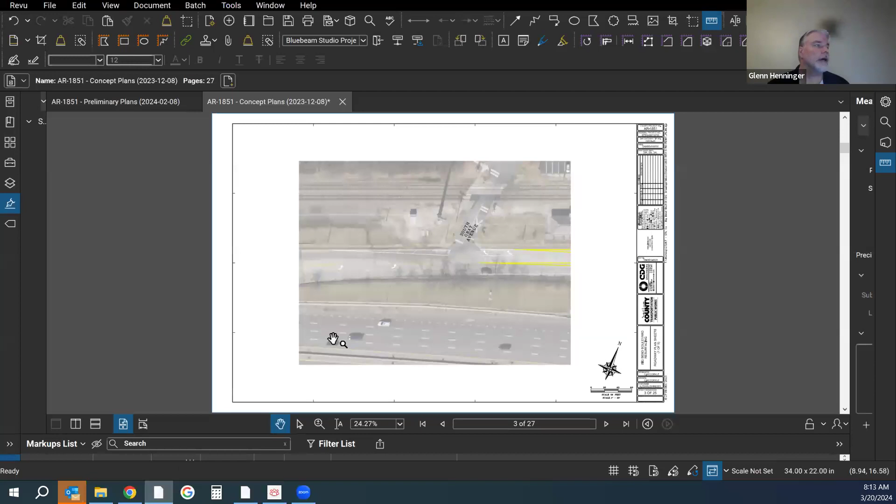All right, can everybody see this screen okay? You see a bunch of pavement, yep. So this is South Gore Avenue. There's the end of the old railroad station right here.

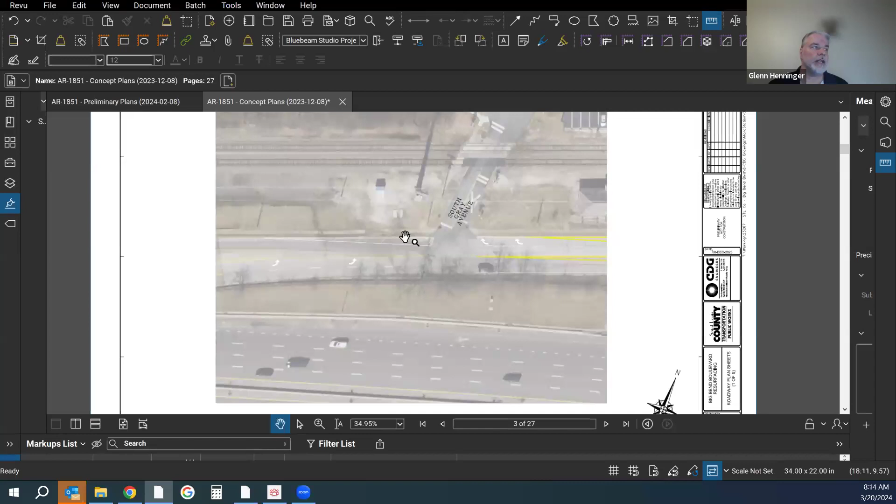Technically, this is actually MoDOT's to maintain as it's approaching their bridge, and they will be replacing their bridge shortly as well. We tried to get that incorporated into our project. They are going to be using that extra space for staging of equipment while they're doing their bridge project, but they did promise that they would mirror our striping patterns and would be including a resurfacing all the way up to our project limits with their bridge. So everything will be new eventually. The striping you see on this page is really just kind of temporary until MoDOT finishes their project.

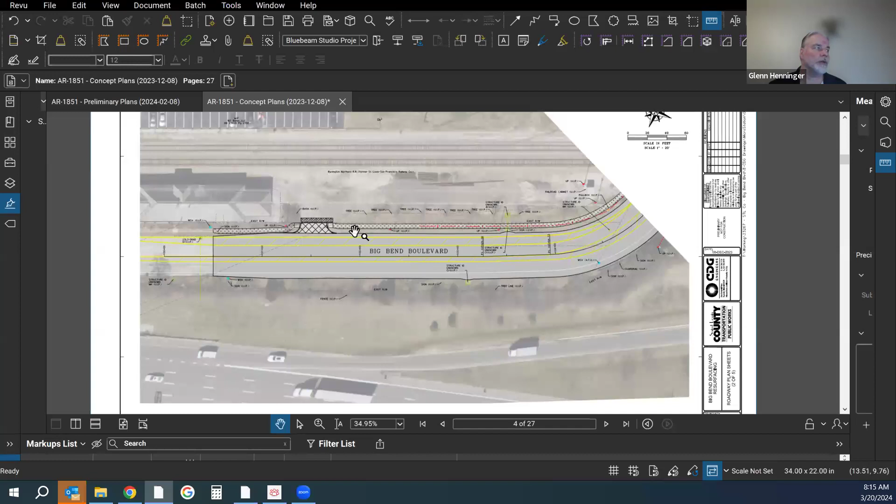Moving east from there was the area that was of concern to us, to try and keep the way it was. Here's the old railroad depot again. We'll be striping out 2 lanes and keeping 1 through lane in each direction. We'll have all new pavement, all new sidewalk, and a new entrance into the railroad's depot.

And moving on from there is where we really get into the area of interest for you all. Once you cross the railroad, we still have 1 through lane in each direction. We try and clean up the Baker Gore intersection as much as possible, with a little bit of curb work, bulb outs, some striping changes. With the road diet now, we are able to provide a dedicated left turn, so that anybody turning left into Baker or Gore can do it outside of the through lane, which is always a good thing for us.

Also in this area, there's a house here with a driveway directly on the corner. Not much we can do about that without actually buying him out, and it wasn't worth buying him out. It hasn't really been causing a safety issue, and speeds are supposed to be fairly low. We will be replacing all of the sidewalk, all of the approaches, and we will be adding a striped and signed crosswalk with refuge.

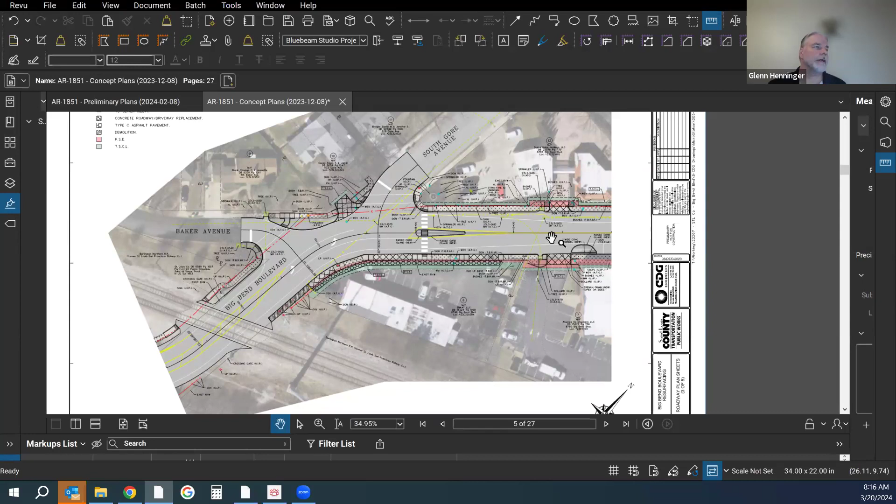Glenn, do you want questions as we go, or do you want it to go through the whole project and come back? I'm good either way.

When you talk about sidewalks, is it the same width as the current sidewalk, or do we see a little expansion? The county has a standard that goes a little bit beyond ADA when sidewalk is at the back of curb. We try wherever possible to go for a minimum of 6 feet. If there is a green space, we will follow ADA, which is a width of 5 feet.

And then we'll have ADA ramps at all these crosswalks and such, so this isn't just a step down curb, it's a ramp. Anywhere you have the shaded area, it's what we call a truncated dome.

And then those hash marks are the build outs, those are bump outs coming into the street on Baker. Well, that's more a curb relocation. Right now that comes in right here, and Baker and Gore come in really close together.

What we've been trying to do for several years now is just make the best use of the existing space we have, and direct people, not necessarily get right-of-way, but just massaging the footprint to increase safety. What we found is that there's a lot of unneeded pavement in this area. Our predecessors had a tendency to go large, and were rather conservative with how much room somebody needs to make turns, things of that nature.

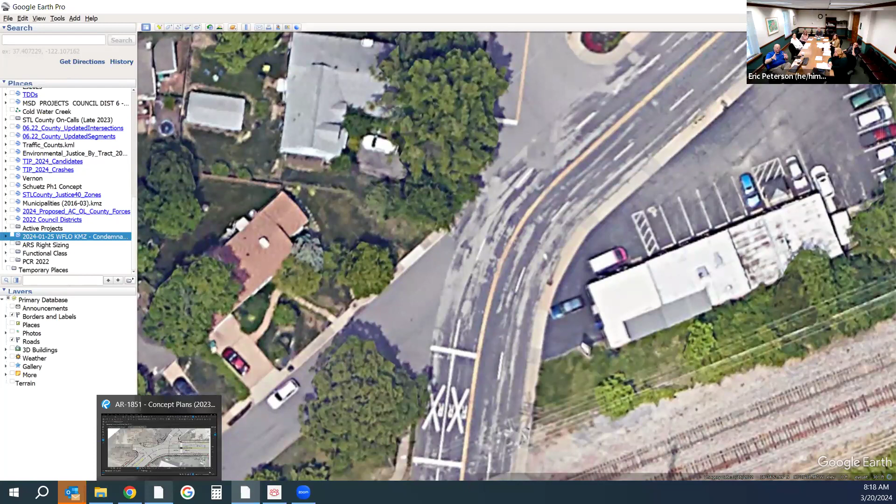So we try and skinny things up wherever possible. The reason I asked about it, from a traffic safety standpoint, because we're talking about safe streets around the city, when you have that extra pavement and you bring it out, those turns theoretically are going to slow the turn, right? A driver's going to have a tighter turn. So they'll still be able to make the turn on pavement, they won't have to roll over the sidewalk or anything, but they will have to go slower.

Just want all of you to know these nice little facts so you can have it when you're talking to people. Glenn, I have a question on the crosswalk.

Is there any consideration for raising these crosswalks, kind of like what they're doing in Kirkwood, where it actually creates a speed hump? Because that crosswalk, if it was a speed hump, would really slow the traffic down as it comes around that corner.

I don't know if that's been discussed yet, but it has been discussed on other projects. That has not been brought up for this one yet. I won't say it's not a possibility. It will depend on budget, and it will also depend on drainage.

We'd really like that to be a consideration anywhere there's a crosswalk in the district, because that really does control traffic speeds. And Glenn, is that a middle island refuge in the middle there? Yes, so the pedestrians have a refuge in the middle.

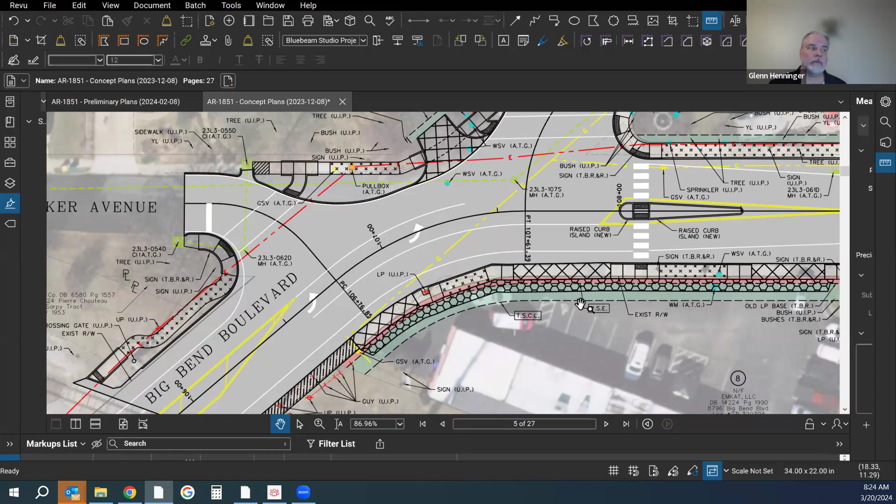So the pedestrian experience on the south side would end at this crosswalk. Rather than pinch down even further the maneuverability for this site, we would actually increase it.

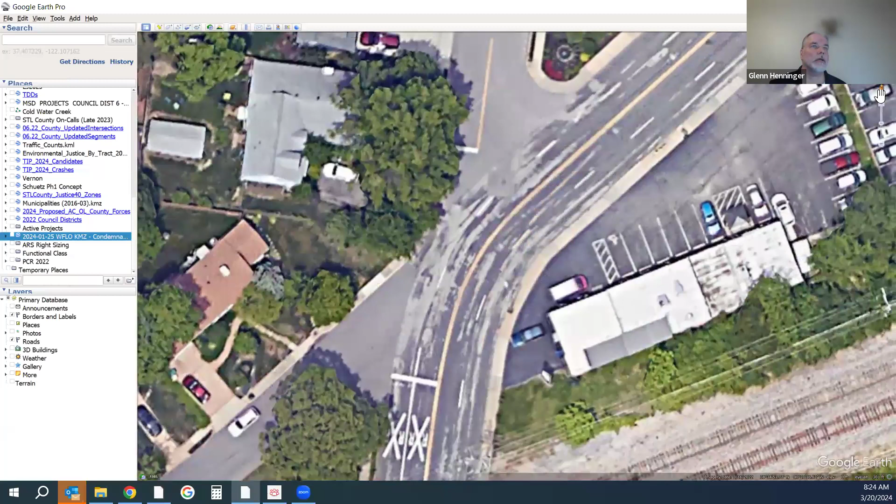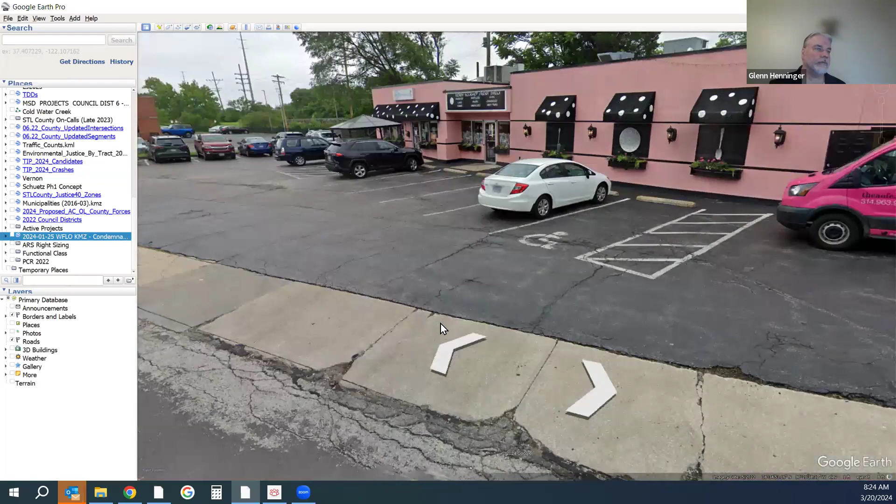The question we still have not answered in our heads if we go forward with that plan is what to do with that space. Currently we have the narrower sidewalk at back of questionable curb and one large entrance.

So if we just take the asphalt all the way to the back, all the way up to the curb, and we put in the crosswalk about here, is it just asphalt?

Would you be worried about people backing out and possibly backing over the curb? Does there need to be anything delineating the parking lot from the curb area? It's just not a normal thing for us.

And this has all happened in the last week or so, so we haven't— it absolutely needs something to keep people from backing out into the street, because they use that all the way up around the edge of the building to back out into the street.

You can see where the van's parked if you pull back up again—they just drive in there over the curb. He's kind of been backed in that space off the street.

If we start with the sidewalk, Glenn—on the sidewalk alone, I didn't see any issue with it. I don't either. Nobody's going that way.

And then for the school kids' safety, I'm going to involve Sergeant Flannery now, because the kids walking to school are going to go on the tracks. That's a whole other separate issue to solve.

But generally, if there's not a sidewalk, pedestrians migrate to a sidewalk if they're going to follow the rules. So not having a sidewalk didn't seem to bother me.

But I wanted to make sure that piece was settled before we got into whatever goes in that space, because that's a little change from where we have been. That is good to know.

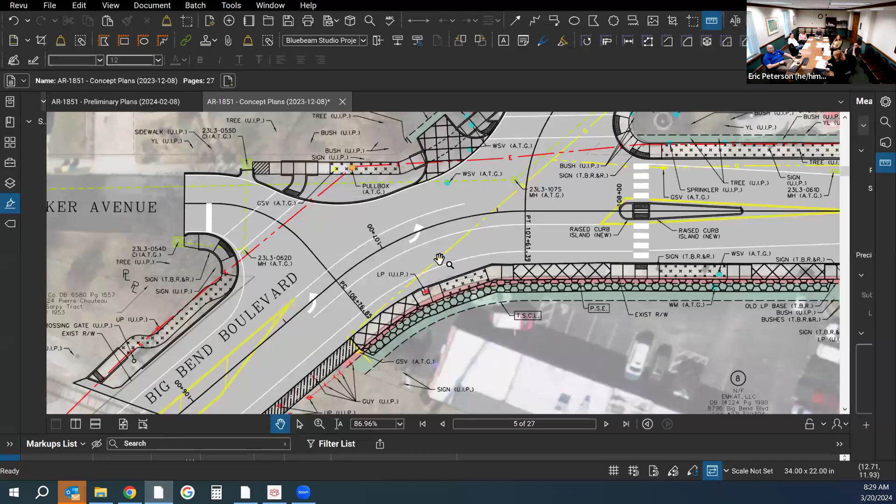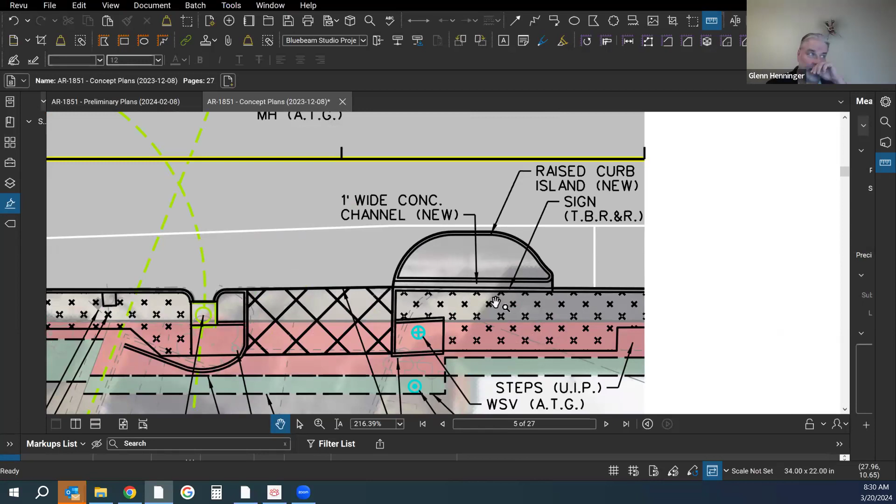Okay, continuing moving east. This is where the road diet starts to pick up the width to put in full-time parking. We try to delineate that parking wherever possible with bulb outs. The bulb outs will have a slot along the curb so they won't be connected for drainage purposes, which makes design much easier and means we don't have to have as many inlets for stormwater and things of that nature.

Again, both sides get new sidewalk and new approaches. The striping for the parking, the county does not do that. We'll do a longitudinal stripe, but we won't do the stripe that delineates individual parking spaces. This is one that Vera and I can actually say we're going to do. Is there striping there now? I think there's striping, right? No. Since it's a through lane in peak hours, currently it's just striped as a travel lane, with signing that says you can't park here during this time, or you can park here during that time. I don't remember the exact language, but there'll be one through lane in each direction right in the middle.

There's not really enough room to have a center left turn lane and parking on both sides, and we realized that. We went - I won't call it nuclear - but I don't know who talked our operations guys into it, and I was shocked to find out they approved this traffic pattern. Again, this changes the intersection footprint at Alma, kind of like...

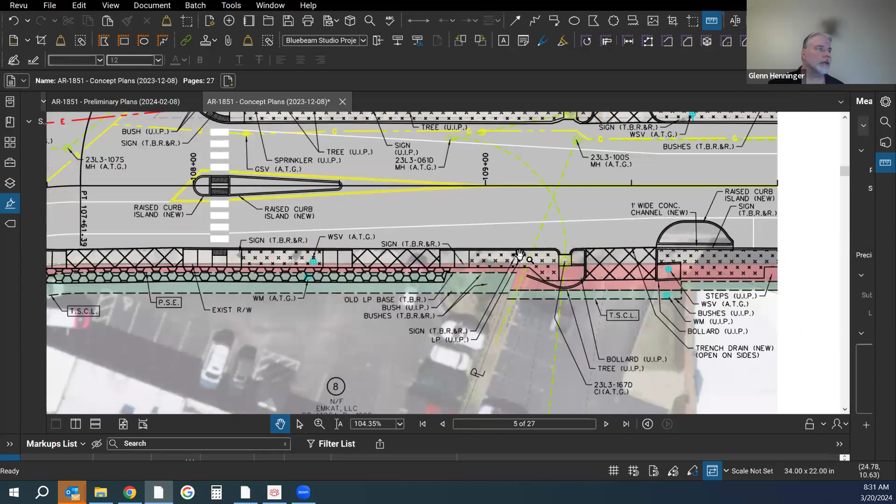Hey Glenn, sorry to interrupt, can you go back one page? I wanted to zoom in on a specific item, though I think this would come up later anyway. Do you see where that inlet is right there? Your hand's pretty close to it, the curb inlet. Here? Well, yeah, just to your right. Can you pop into street view on that real quick, please?

Basically, here's the light pole, and it's going to be a conflict. If this was a regular project where we weren't working with the city and knowing your different desires, we would work around it, get our 4 or 5 feet or whatever we need for ADA, and move on. But since we're talking lighting, I wanted to check in on placement, because this is definitely a conflict that will mess with our ADA sidewalk here. So if you have any thoughts - are these light poles getting removed and replaced? It sounds like yes. If so, can we get a better location for the pedestrian route?

Namely, on the list I had, they don't have any spots for banners over the road, potential banner placement that we know we have to work with you on, but poles and such like that. We have not set heights, we've not done any of that. Is it an overhang light? Is it a candlestick, what we call the ones we have in Old Webster, Old Orchard, just the lamp on top of the pole. So we're way at the beginning of that.

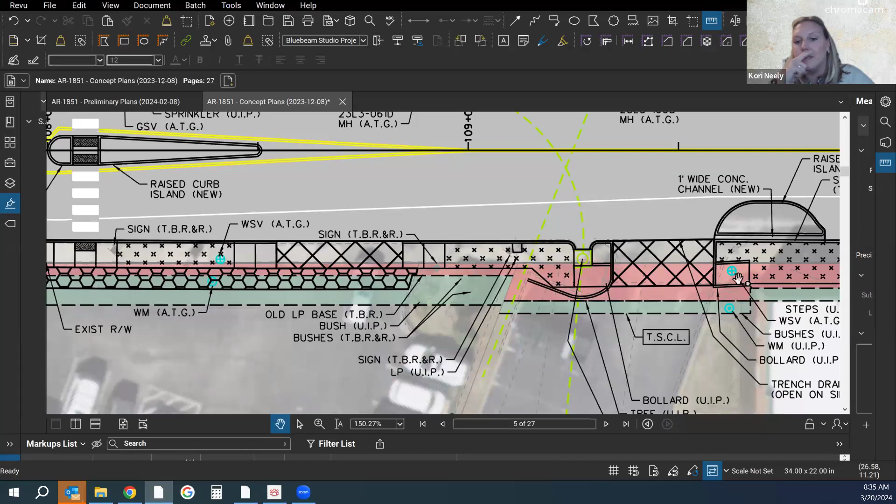That's great. We'll definitely be talking to you right away about acquisition, because this curb inlet we're looking at presents an issue for our ADA ramp. We don't have enough room to ramp someone down before we hit that driveway. So if you look back at our plan, right now we're having to go around that curb inlet, which is odd, but there was really no other way to do it. Sounds like you're on board with working with us. That's great, thank you.

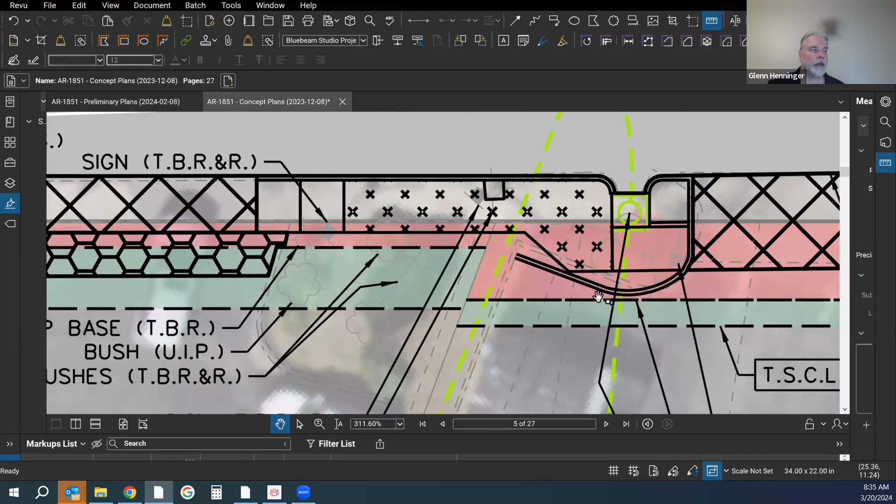So the gray dash line is the current internal curb right here, and the solid black is what we are currently proposing.

Moving on from there, at Alma we have bulb outs almost all the way around, just to delineate the parking area and shorten up pedestrian crossings. At this location, I don't think a raised crosswalk will be possible because of drainage, but we will definitely investigate further. We are removing a lot of pavement, moving some curb, directing people to take their turn slowly.

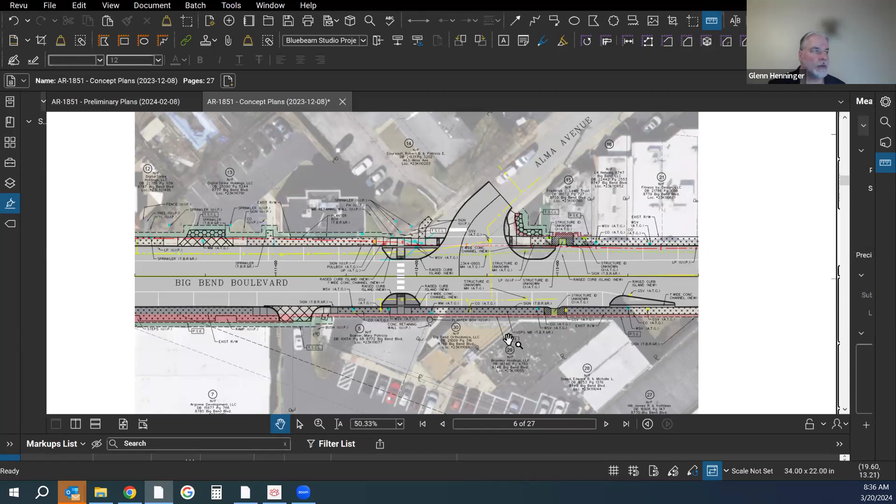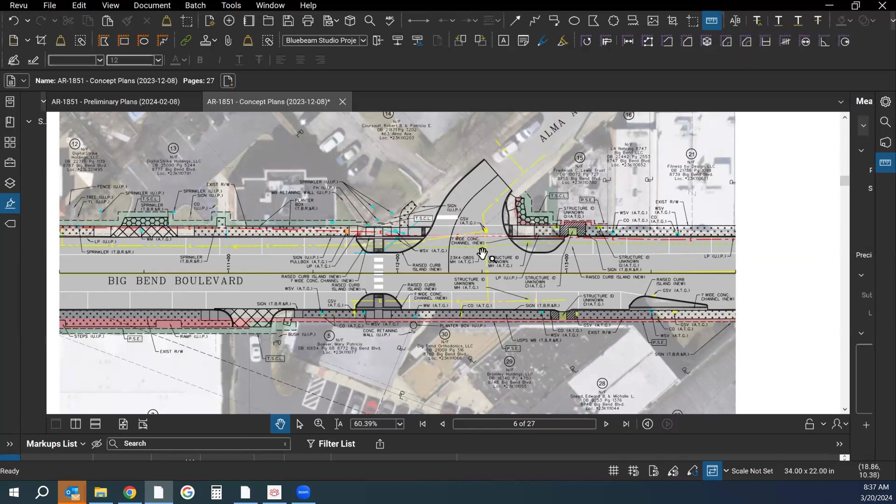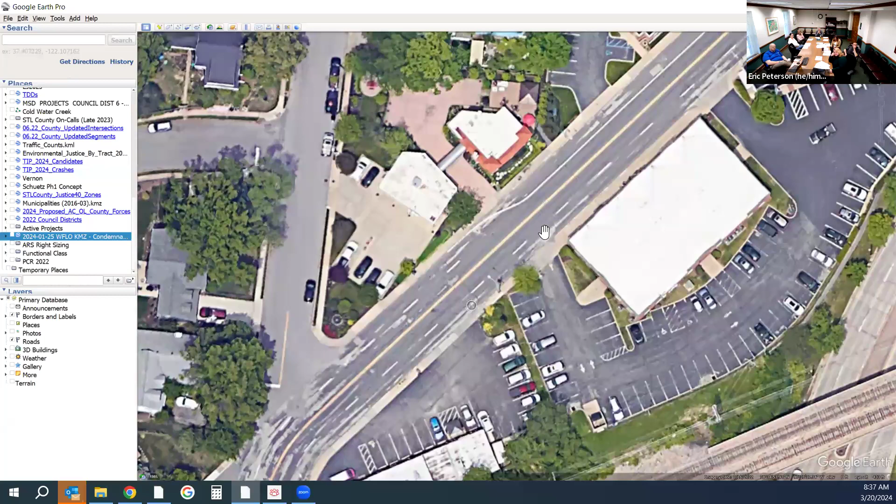Other than that, I'm not sure there's much else to talk about on this page. Let me say that you're taking away the boss's parking spot there on the corner. Which parking spot is that? The northeast corner of Alma, on the intersection, not on the streetway. Go a little left, and right there, off the sidewalk. You can see a car there behind the green and pebbles. Oh, there. Okay, let me find that. Yep, right there.

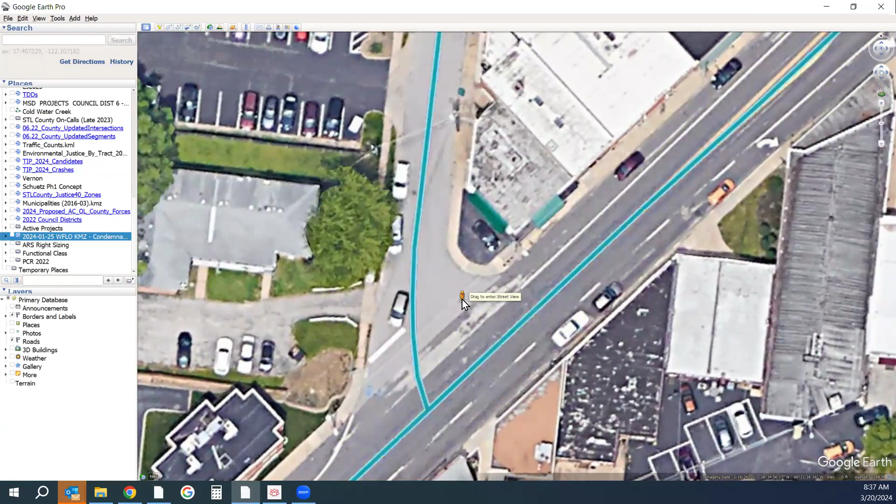There'll be lots of full-time parking on the street. I'm gonna call that an Alma call. If there's not supposed to be any parking right here, whether or not that's curb, or whether you're supposed to be crossing, is there an entrance? No, it's just a low curb. So I have to wait for you to do that. That's 25 years of asphalt overlays.

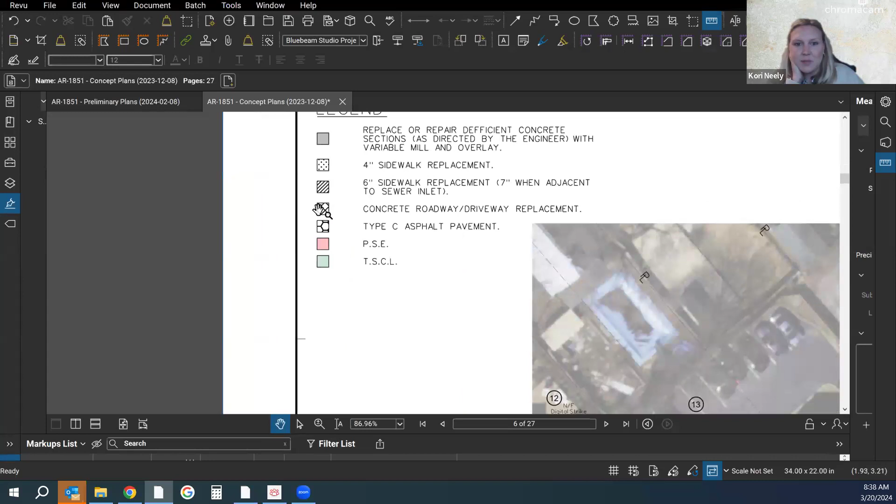Our proposal does not really change that condition. True, it will make it much more difficult for them to go. Well, they already have the planters in front of them, but if for some reason they'd like to drive out this way, they would have to back out onto Alma. I think he does that anyway. That plan, the pebbles and everything, that's really just hatching for pavement, but after we build the ramp we're putting back the pavement, so it would be more or less the same as existing for that car.

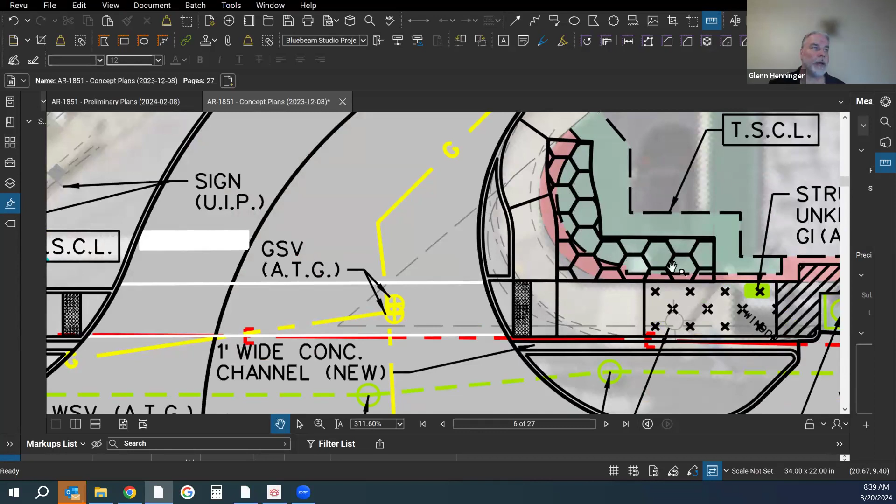That honeycomb symbol is for type C asphalt. So just to get everything to fit, the new ramp and sidewalk reconfiguration, depending on elevations and how it meets the existing asphalt, they would be putting back that same asphalt. Now, with the increase in on-street parking, if somebody wanted that space to be green, we could increase our TSCL and go ahead and put it all back green instead of that spot.

We were not planning on changing that condition. We just have to change the elevation of some of the asphalt a little bit just to make it all fit.

Glenn and Kori, on bulb outs, can I ask a question that our Green Space Commission is going to ask about this project? Are the bulb outs solid concrete, or is the interior a green well that water can drain in and pool in and such? Or be a planter in such a way? And to the commission, then if it is, what do you think about that and the aesthetic of that?

Works great in some places. I don't think we have any in Webster though, at all in that regard. So with the size, we were planning on solid concrete.

I don't know that we would, the speed limit's posted 25 I believe. I don't believe we would be interested in planters too close to the road, but I wouldn't think it'd be too big an issue if we could get them set back as far as possible. But for now, they are planned to be solid concrete.

I was really thinking of just the sort of well with the rock at the bottom, you know what I mean, to drain out, pool water, collect it, and then let it drain and release slower. I don't know if that's a valid concept or not, or needed. I just, the various options you see in cities, so.

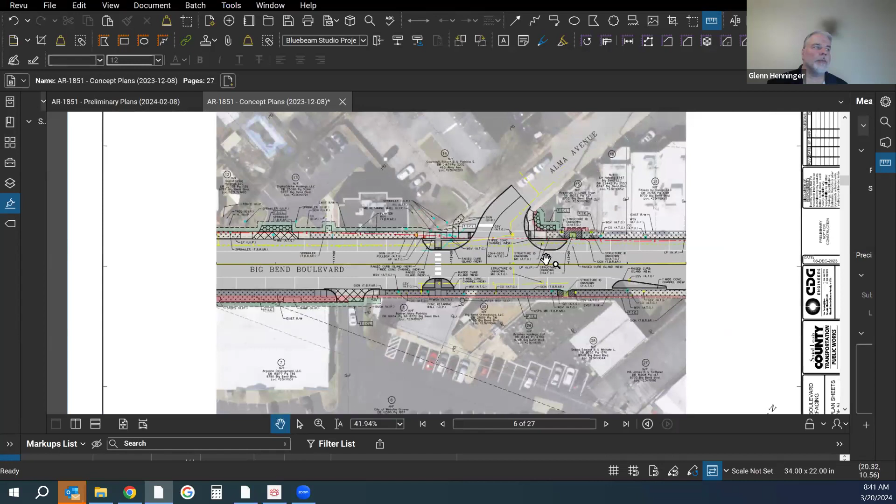Yeah, I think we need a little bit bigger area before we start thinking along those lines to really do any good. And I guess I'll add that most of the time when you're doing that sort of design, it's because you have to be treating the water, where we're not necessarily changing patterns in impervious pavement, or adding impervious pavement on any of this.

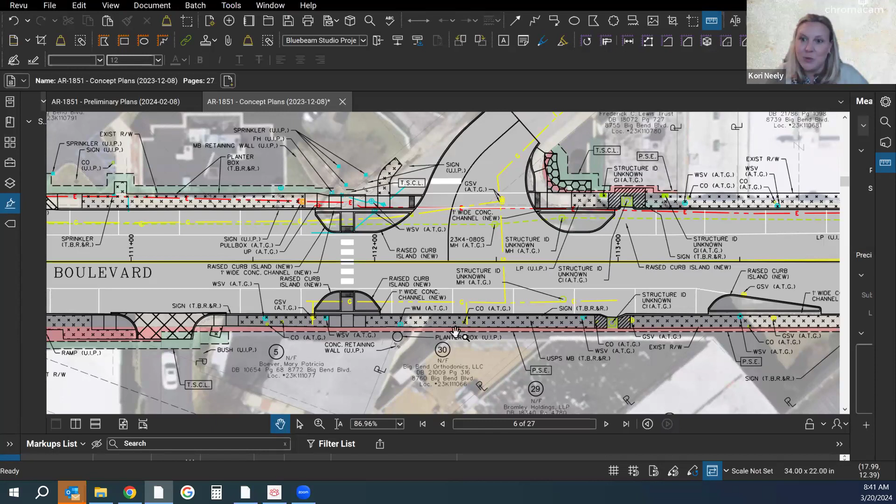Sure. Oh, these are no maintenance. Yeah, we put planters out there, we can do that. Yeah, I agree with you. I just, right, is any of this hazardous to bicycles?

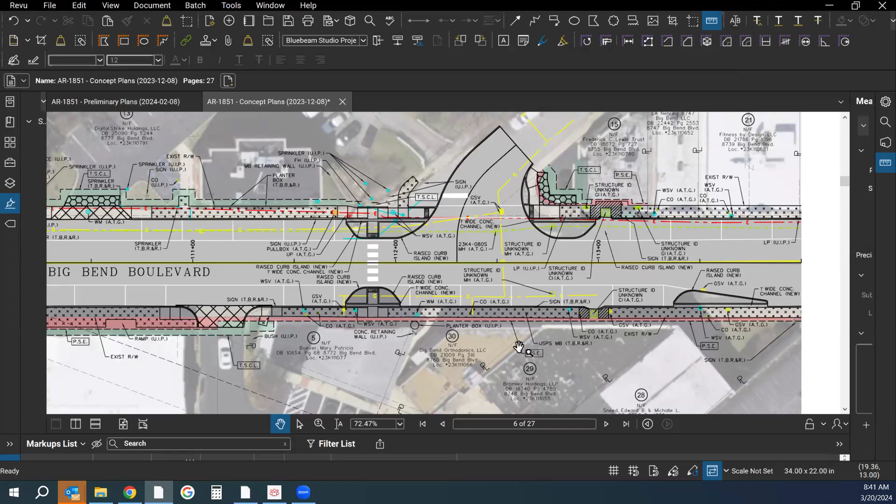Well, bicycles will have to share the road. Well, they'll have to ride around parked cars, and they'll have to ride around the bump outs, or bulb outs, excuse me. But Big Bend is named in the St. Louis County Action Plan for Walking and Biking for a shared use path.

Through this area, with the way the buildings are configured and the existing sidewalk there, our shared use paths are 10 feet wide. There's not going to be any way to really ever do that. So it will most likely be beyond my tenure, but whoever replaces me will have to really be thinking about parallel routes when the bike network in this area really gets going.

Luckily the speeds are supposed to be low, I should say, but yeah, as far as a dedicated bike space, it's going to be very difficult, even without the bulb outs.

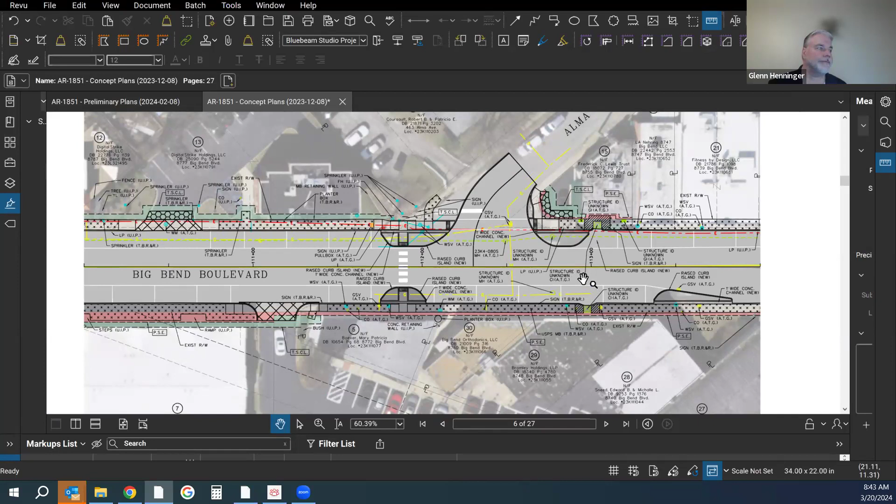Yeah, I mean, I think anything can be done, but it's what are you willing to give up? Are you willing to give up the parking? Are you willing, that sort of thing. And right, we didn't think that you would want to. We thought that would be a non-starter.

I don't think you guys want to give up parking, so we need the parking. Yeah, we need the parking. So yeah, I mean, it is a concept though. Obviously the city's very keen on the biking aspect as well, so we might be talking about how do we path around this area and such.

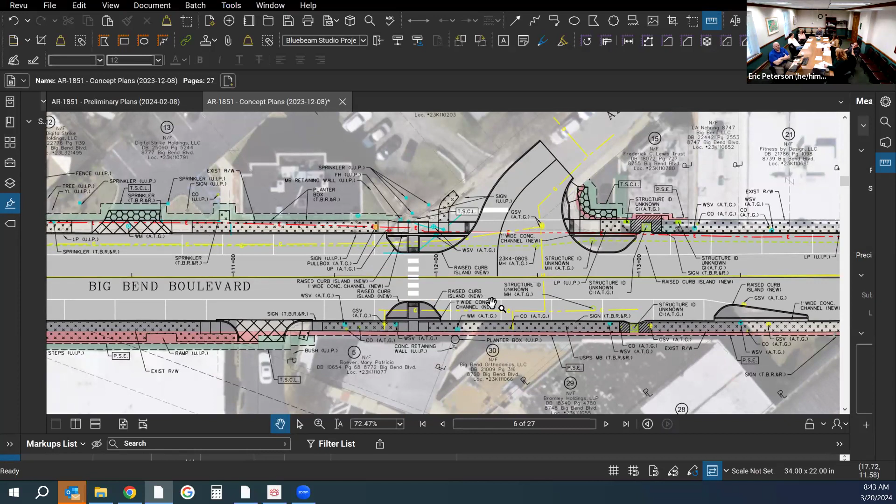And then we get to the east end of what was contemplated as a permit project, and we added the Elm intersection into this. When we first started talking about a joint project, Todd got us in touch with the school district and some concerned folks about how children get through this busy intersection.

You'll notice we kind of lose the aerial and the striping here. This was a different plan, and our consultant has a sub working on the intersection design, so it was a little behind. But what we are doing there, other than continuing the parking on the south side, is it becomes a right turn lane, so that will go away approaching the intersection.

But same deal as with Alma, Gore, and Baker: anywhere that is not absolutely needed for cars to make their turns or through movements gets curbed. Bulb outs and islands are getting revised to create as much pedestrian space as possible, fixing the alignment of crosswalks as much as possible. With the skewed intersection, that's very difficult, but fixing the skews is also very expensive, so for this maintenance type project it just wasn't on the table. We think we've done the best we can without much impact.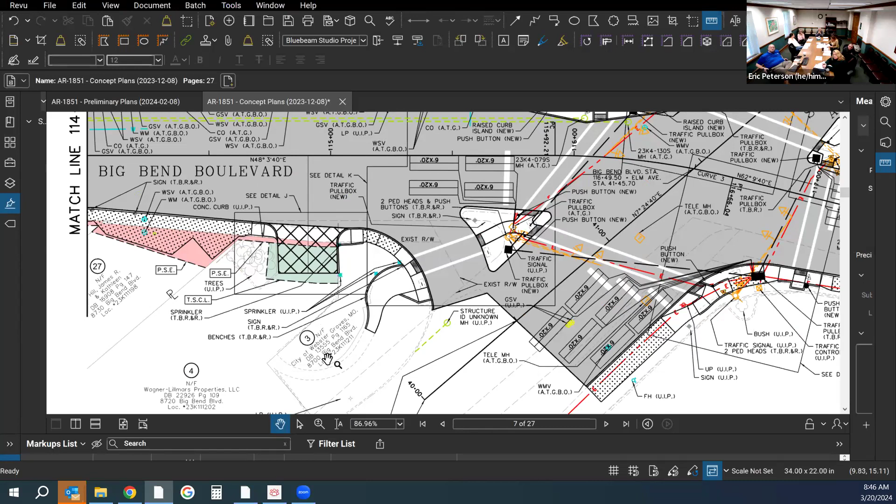How about the area in front of the Baywood Union where the cones are now? Are we far enough down Big Bend on the north side to stop the parking there? Because it doesn't look like it from that drawing.

What dictated where this new curb goes is this turning movement. I don't remember the exact size of vehicles, and you guys probably wouldn't care about the acronyms anyway, but we got our consultants information from you folks as far as what kind of trucks may or may not be entering on a regular basis. We always realize there's a chance—once a month, maybe once a week—that larger vehicles need to get into the area, but we try not to design for that because it leads to the larger problems with fast turns that we're trying to fix. So there is a need for a truck to be able to turn up into this area just to get straightened out.

And we did hear about the parking issues recently, and we're still trying to figure out just what to provide in this space for the truck. All they really need is a hard surface—it doesn't necessarily need to be flush and paved the same as the rest of the road—so it's obvious where we are expecting the parking to start.

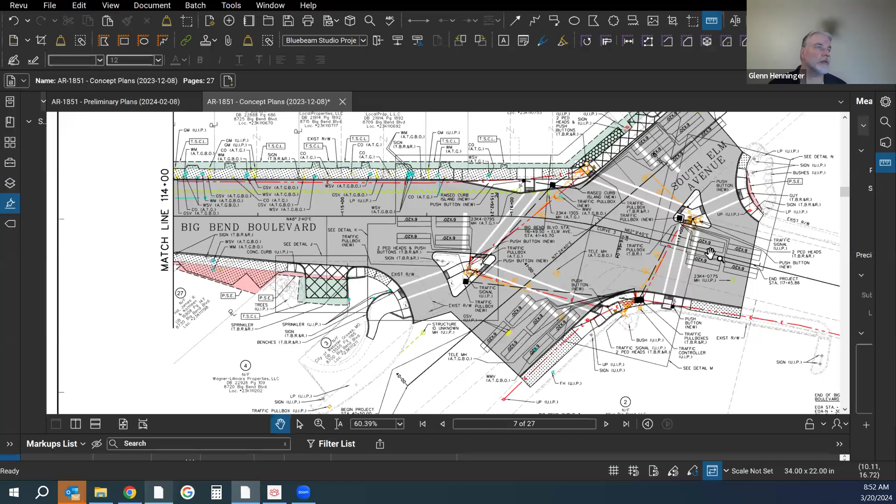When we look at these for the application, we look for instances like this where it's obvious that could have been increased and made for more pedestrian friendly refuge, shortening crossing distances. Especially ADA wise, the way it just had one cut through coming out into both crosswalks, that is a big no-no. So the proposed is much improved in that regard.

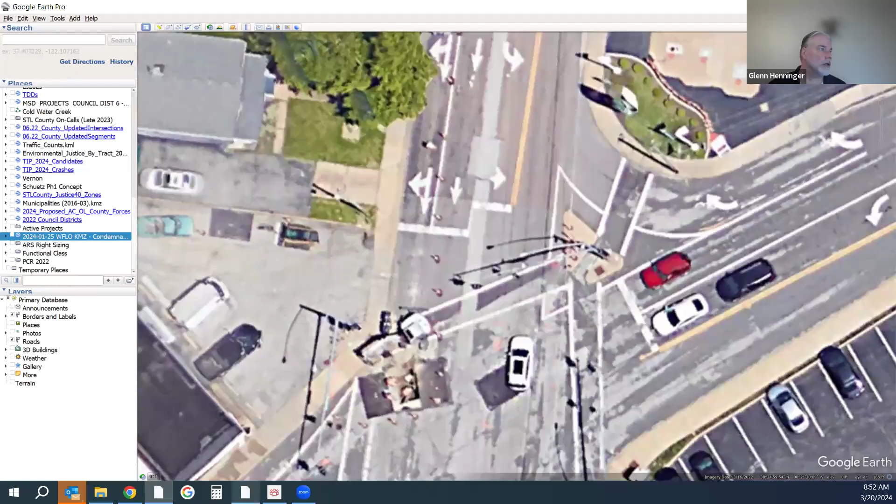And the same goes for the larger island in the opposite corner. It also just had crosswalks meeting at the nose of the island, and it's just an old, outdated design. Sure, it was fine 50 years ago, but the pedestrian walk is shorter now, correct?

Over the major skews, is it? I would say that both Big Bend crossings are somewhat shorter. The Elm crossings are probably about the same. You know, Glenn, oddly enough, that northeast island is not that much bigger, if you look at the existing.

I don't know, well, I have a meeting with the consultant. I can make a note to ask why, if they ran Auto Turn, what. Isn't that weird? This skew right here, this right turn is probably going to be very difficult for anything.

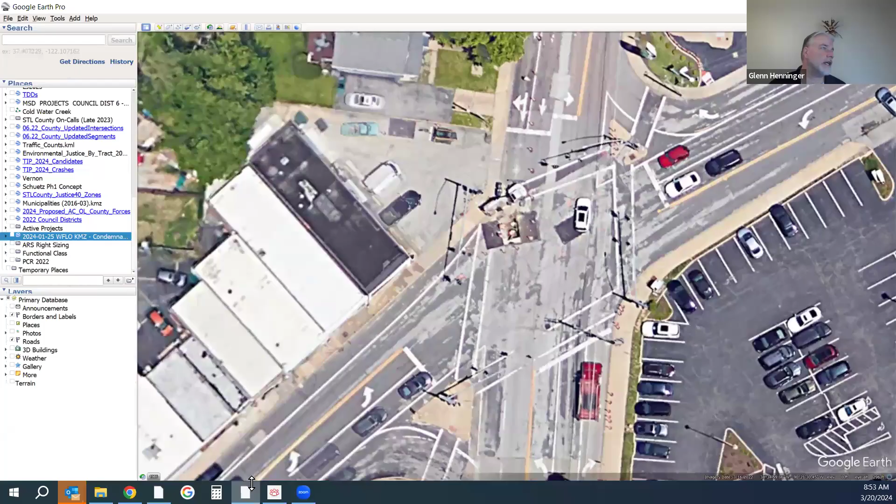Well, then I guess the question is, what's our design vehicle? What kind of vehicles are making that turn? I mean, even for an SU-40, that might be difficult. That is another place, depending on budget, because it wasn't considered in the TIP application, that we could consider a truck apron.

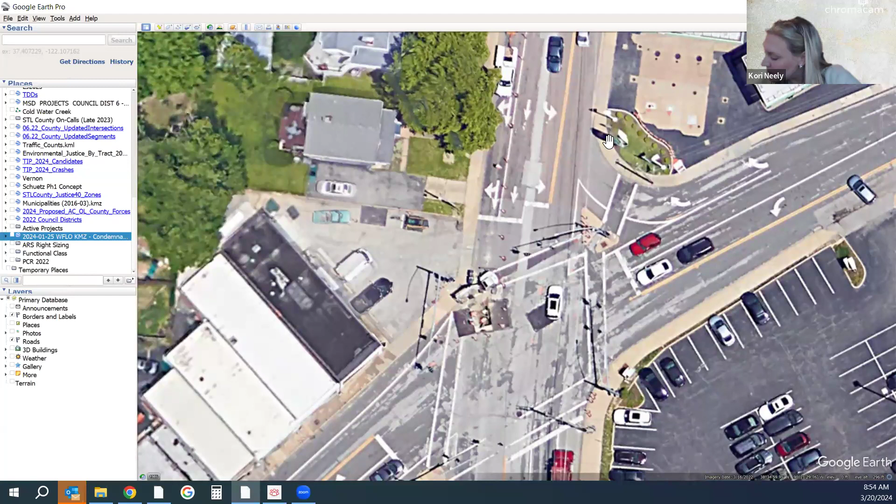Okay, make note of that. Yeah, we have a meeting with the consultant on Friday, so I can ask a couple of those questions. That would further slow down that turn and shorten the crossing.

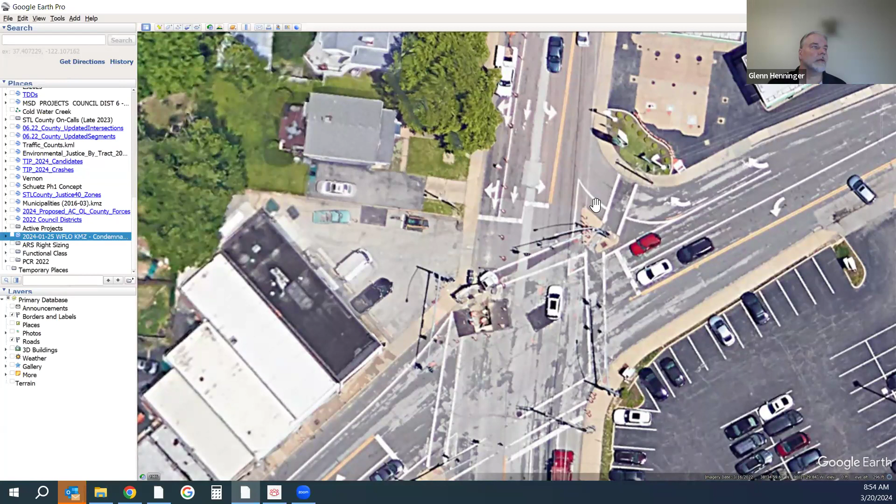So that is the proposal. The signal equipment itself will be replaced as needed, so it's not a full signal rebuild. Just that some of the signal equipment is going to be in the way of ADA, and there's going to be minor adjustments.

The northwest corner right now, both crossings come together, and we are separating them. So we will need all new pedestrian equipment in this corner. But other than that, it's not a full signal rebuild, it's just as necessary.

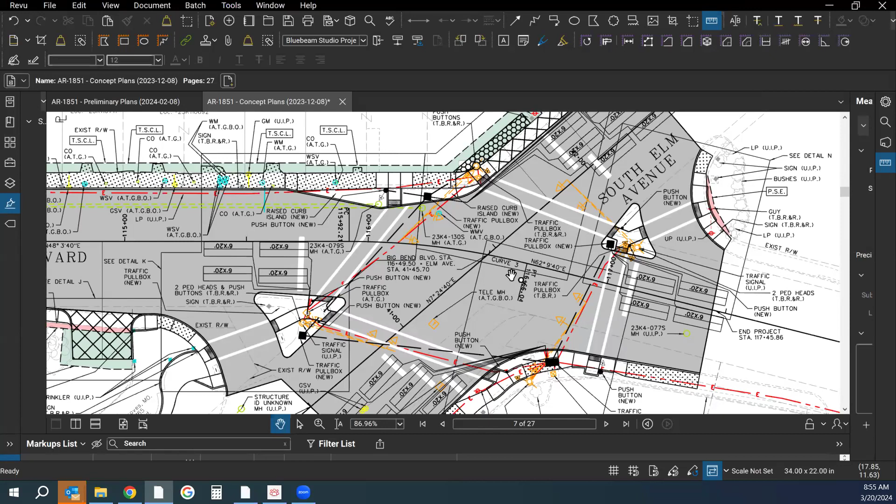Feedback, folks? Looks good.

So to answer Glenn and Kori, Old Webster, Old Orchard, the sidewalks are big enough that we can have benches in places, there's plenty of refuge space for ADA to still get through. I don't think we have that. I just want to make sure, unless we get green space like Jeff has talked about, we don't have a lot of space for those pedestrian facilities.

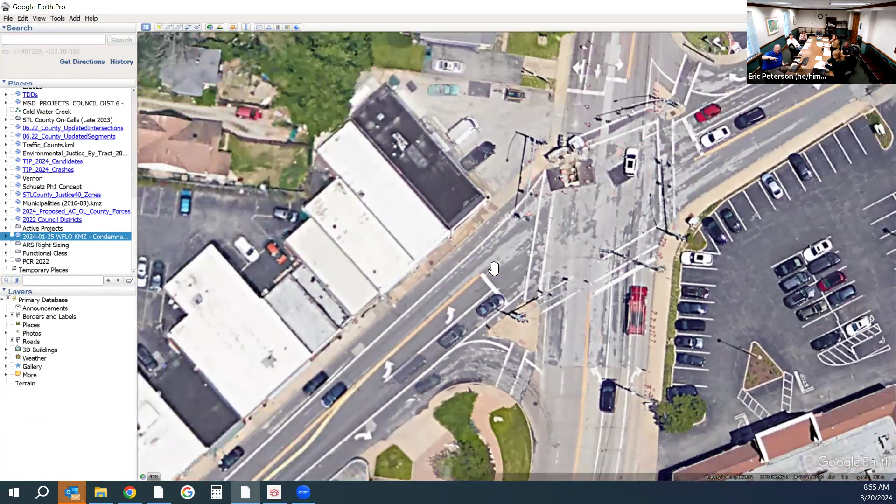Is that correct? I would say that in general... Glenn, Glenn, you cut out a little bit, Glenn. Okay, I would say in general, that is a good synopsis.

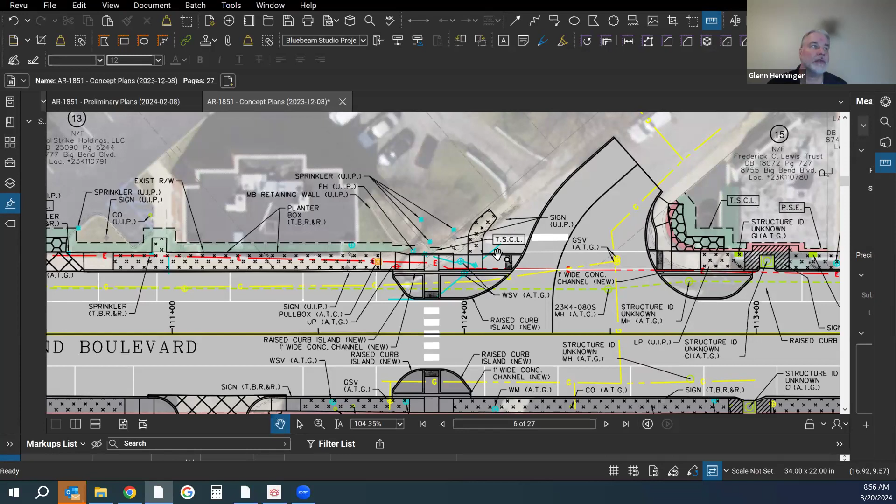We don't really detail what's going in this area that we're removing pavement at Alma. If we keep that all hard space, there's nothing really pushing us to put it back as grass. There might be enough space in that corner to do something along those lines.

But really, one space, no, you don't have the width for benches. Right, which I think we knew. I just want to make sure everyone was on the same page. Definitely. Yeah, we'll be lucky to get 6 feet of sidewalk on one side of it. It's got to be 4 or less now.

Right. And then there's also the curb relocations at Baker and Gore, but that's a little bit outside your area, where you would probably want benches. Yeah, so this space right here will most likely just become green.

Okay, any questions for Vera?

Obviously, Vera's department, Public Works, is who we'll work with on the city project. You saw the sheet I sent out for elements, things you might want to see as you drive around the district. Vera's team will be the people we work with, along with engineers, to help coordinate this all, and obviously getting the county's permission to do what we're going to do. So we'll be involved with them.

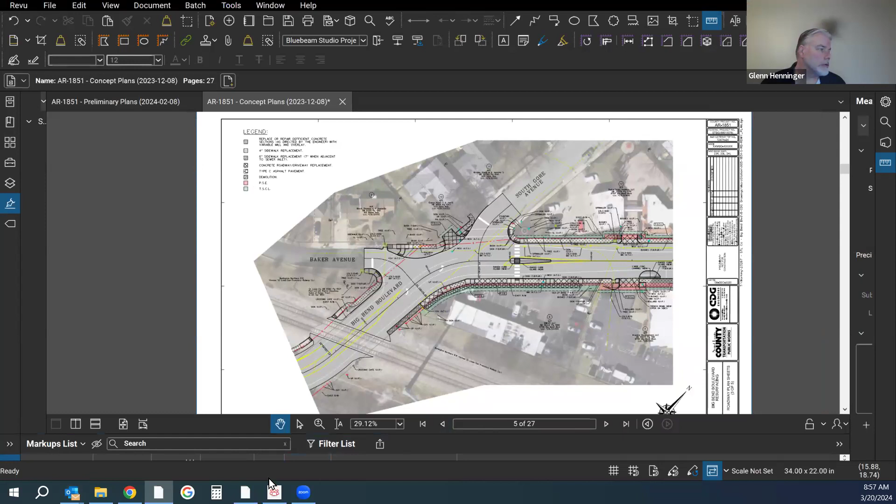Is there anything else, folks? Glenn, I have a question, sorry, it's not really related. You said Big Bend is a new bridge. Is that a resurface or is that a totally new bridge? That's a totally new bridge. Wow. Okay, go ahead, Glenn.

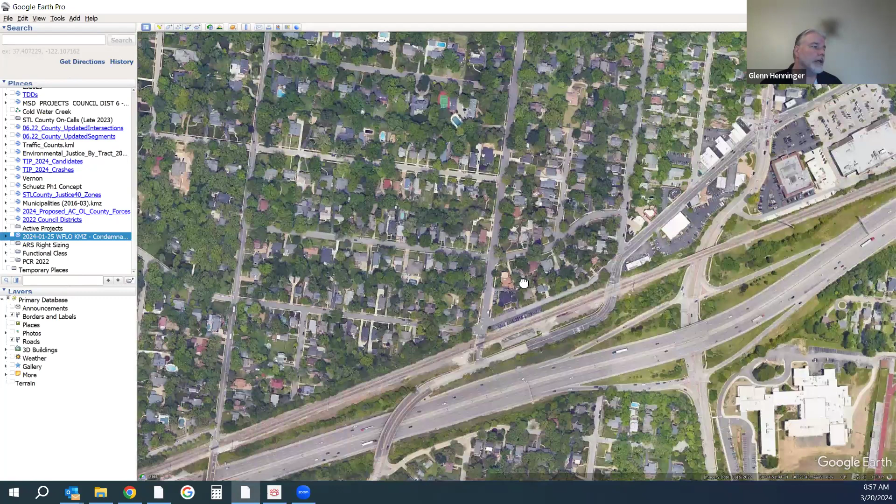I was just going to ask Ray, I don't know when the last time he got an update on the MoDOT schedule, but I thought it was '27. Yeah, since we did the road diet to the west, and now have the plan for the road diet to the east, they're going to save a good bit of money on their bridge plans, and they'll only have one through lane of pavement. Right now it's striped out and there's a lot of unused bridge space, so the bridge footprint will get a lot smaller than it is today.

Sure, there'll still be pedestrian accommodations on one side. Ray can put you in touch with their area engineer if you don't speak to him on a regular basis. Public Works, yes, that one falls just outside the district, but obviously affects them, so we'll be involved, because we want to make sure we don't have an end-of-road bridge type thing again.

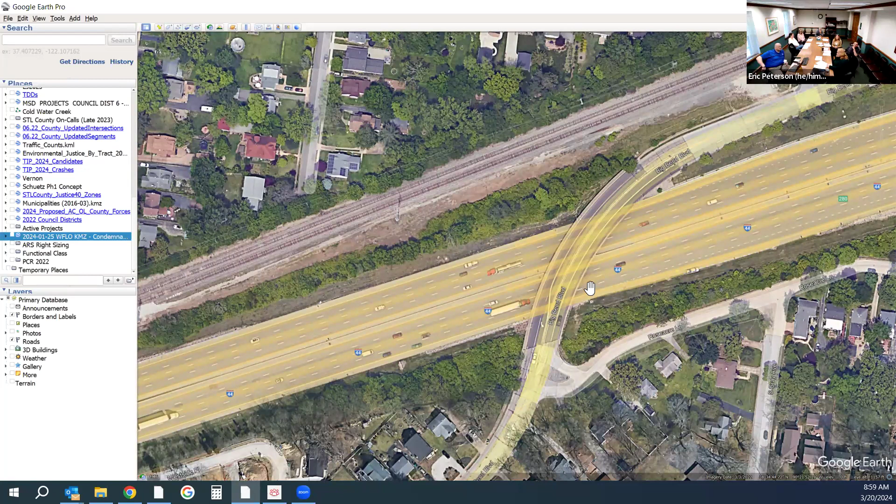Sorry, well there's 2 bridges. So are they going to do one at a time or both? I'm sure, I know that's a MoDOT question, I just didn't know if you knew. Two bridges, yeah. They're separated, really close together, but two different structures. I think they'll just take it down and there'll be one structure, like two lanes of traffic. Okay, I just didn't know about the traffic impact.

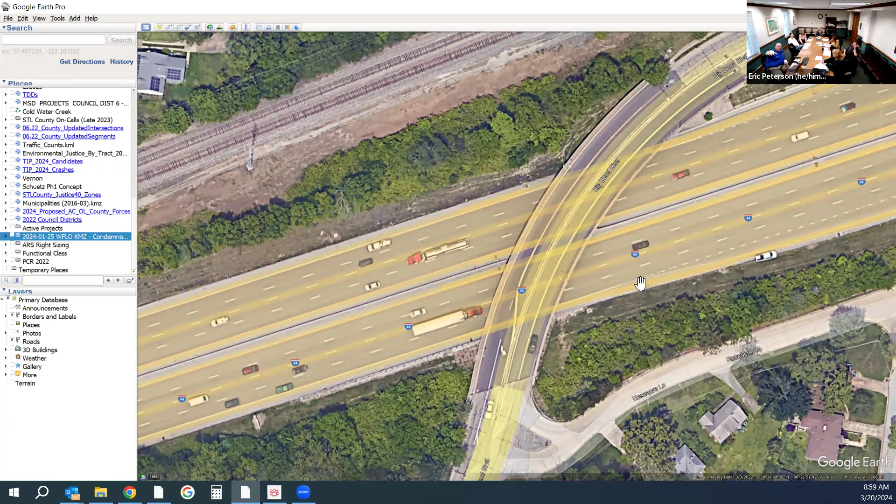Okay, thank you. So yes, it would be a closure. That's probably something you guys would want to keep an eye on. Well, that's where we're going next is schedule. So per the federal grant, '27 is construction on the project we just talked about and the bridge, two different projects, but that's the timeline, correct?

It's still a timeline as far as I know, but east-west could move that up. My point is we could end up earlier. East-West Gateway has been begging the LPAs, the local agencies, sponsors, to accelerate project schedules wherever possible. The biggest impediment for us recently, well, it's always been, has been right-of-way negotiations.

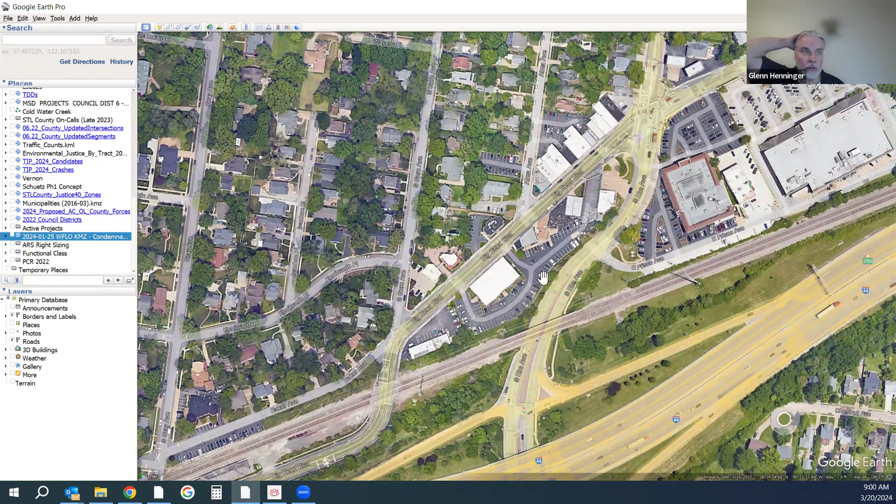Like I said, when we were looking at the plans, the green is TCE, temporary construction easement. We still have a document detailing what we're allowed to do with it in that area, how long we may need it for, and how it will be left for the property owner. The pink is permanent easement. These are just preliminary plans, but each individual property owner, once we get the right-of-way plans approved, will be approached.

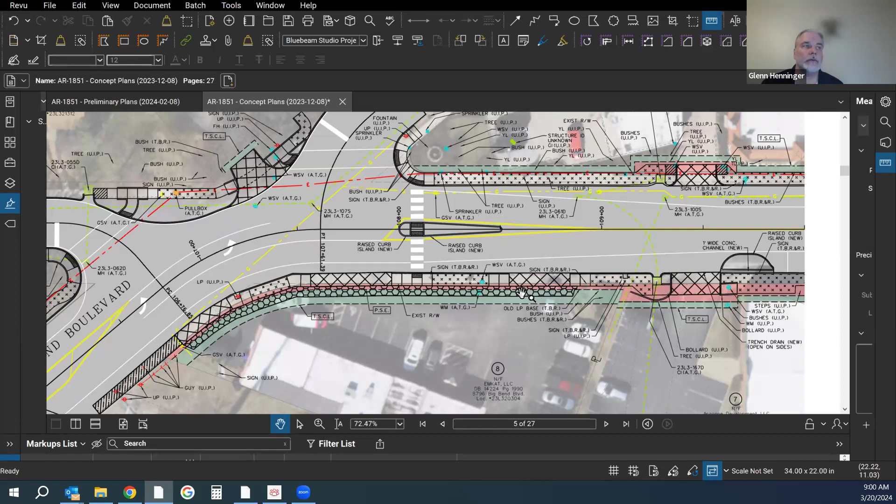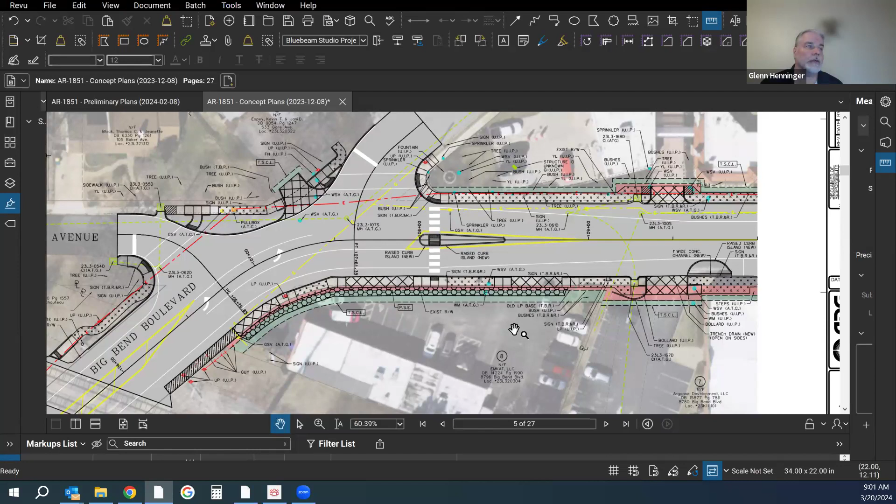Given that the idea throughout the business district came from you all, there is a hope that there would be right-of-way donations, but we're required to tell you, and I'm sure you think of it too, that your property is worth money. So if donations aren't in the cards, our second hope is that none of these go to condemnation. If nothing goes to condemnation, that saves the schedule 6 months.

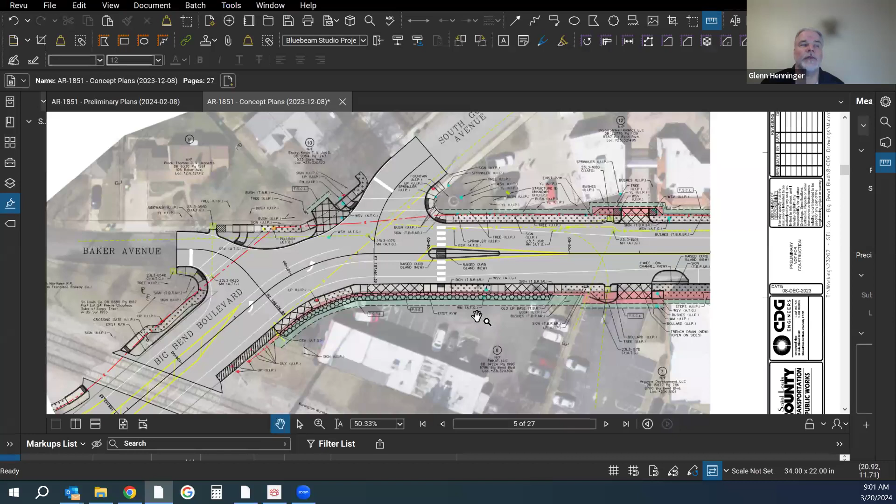So there's a slight chance it would go before '27, but we won't be counting on it. The plan doesn't call for any condemnation, there's no way to get to condemnation of a building that's sitting there. It's all level ground outside of buildings, correct? Yeah, it's all small strips adjacent to existing right of way just to get everything to fit and give us room to maintain what we build.

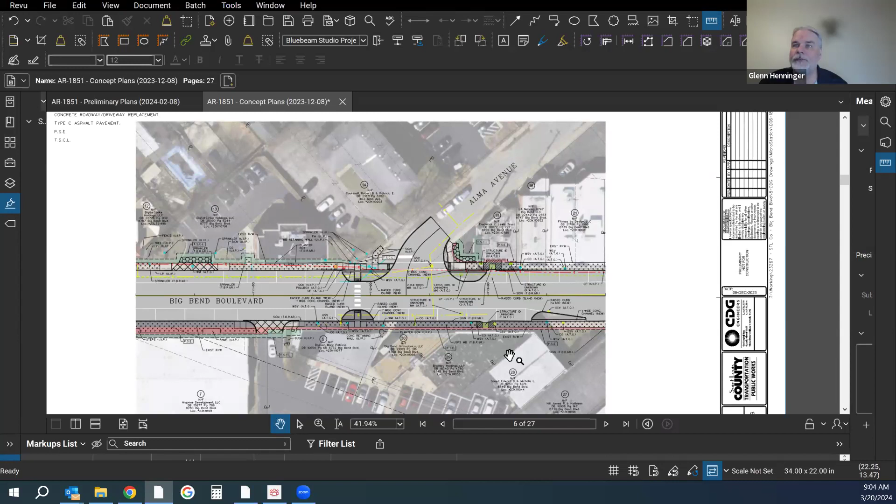It's part of the MoDOT policy—they have what they call an RER process, request for environmental review. The public meeting's a checkbox. Once we get the RER approved, we can finalize right-of-way plans, and then that's when we'll start the individual talks about what it takes to get this project done. On our side, we'll begin to look at our elements, the things we want to include on our project in conjunction.

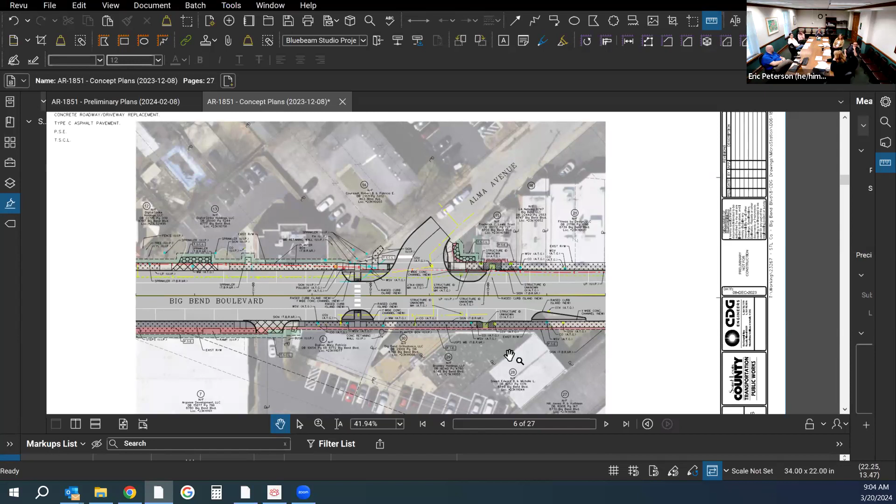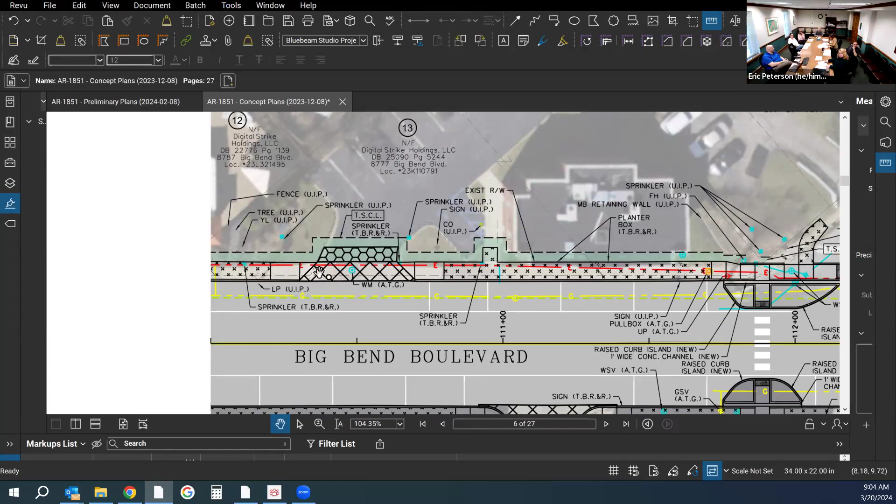Okay, one last question too, sorry, before we end. Parcel 13—I think you're zoomed in on it, Glenn—but that building, there's a building right here on it. I guess, is that a law firm or something? Do any of you know? It was a law firm. Oh, okay, it's Chris's building now. Yeah, that's Chris's building, so the two buildings to the west of that are owned now by the third—that one you're talking about is owned by that parcel.

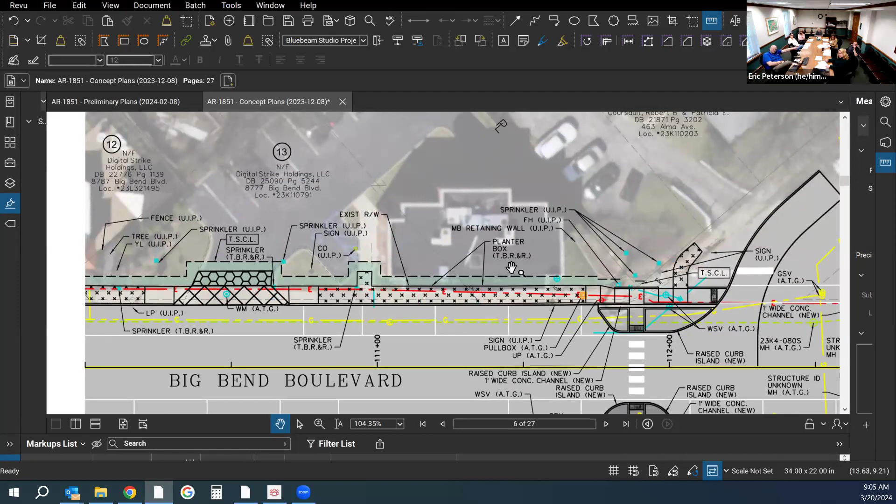Okay, I'm talking about this—go to the right, Glenn, this building. Yeah, that building there is the third building, yes. He owns two more to the west, to the left. Okay, I guess I'm just asking, so there were some planters out there when we did our survey and they're gone now.

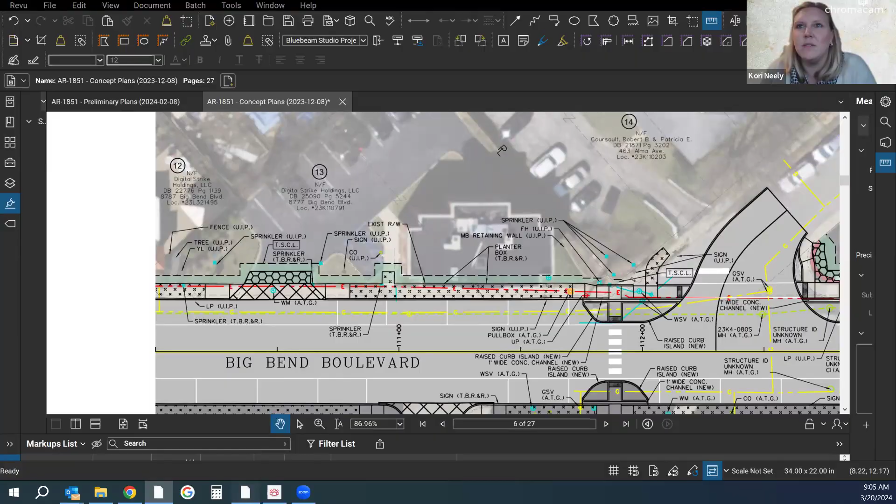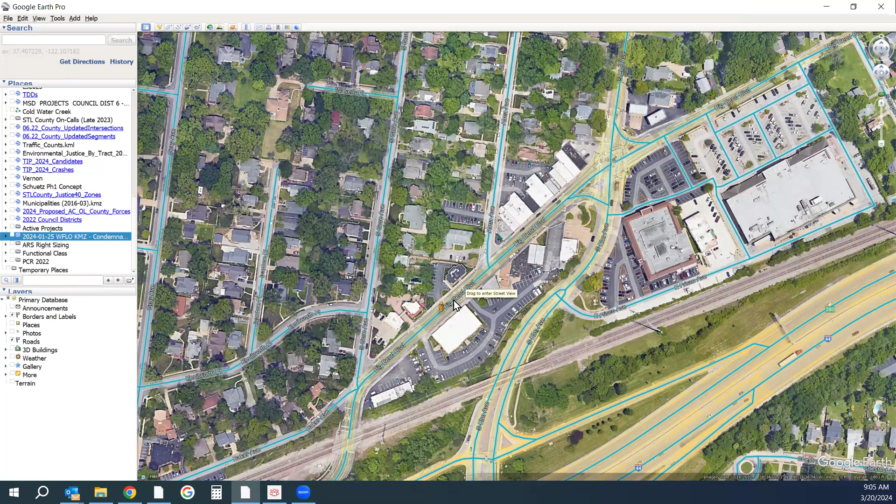I don't know, it just seemed like they maybe were doing some work very close to the right of way, and then some of the stuff was on right of way. Anyway, if you knew that owner, I was just gonna see—oh yeah, he's part of the commission. He's not here today, he's just out of town, but I don't think there's anything permanent there that would be in the easement. No, it just looked like some stuff has changed since we got our survey, and it looked like it could have been.

Yes, but this picture doesn't show—they do have a flower box in front of both of those windows on the street side, and they've got a sign now in that green space, that oval green space. Right, okay, it doesn't look like that now. Oh okay, that's what it is. Okay, yeah, it just seemed like those planters are kind of on our right of way now. They took all the green space, the green in front of the building, and now that's all planters—that's the problem. Street view's out of date, yes.

Yeah, so anyway, that could be an issue, so that's why I was like, if you guys knew him—he's on the commission. He'll be at the meeting, so we'll be able to have a private meeting with him, talk about whatever right-of-way things we need. Sounds good, thank you. All right.

So if we haven't shared yet, all of our projects in the last couple of years have gotten their own specific project page on the county website that has status. Yeah, they have it linked in the agenda, Glenn. They did have it linked. Okay, cool, that was the last thing I was gonna mention.